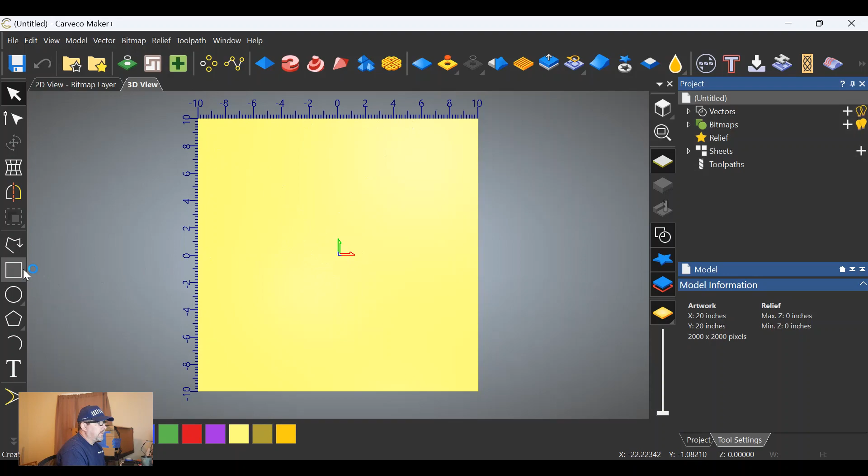At any rate, 20 by 20 work area. If you're using Carveco Maker Plus, I'm assuming you can get to this point without me showing you how. Origin is in the center, work area is 20 by 20 again. We're going to begin by grabbing the square tool, starting in the top left and dragging to the right to create a square that matches the size of our work area.

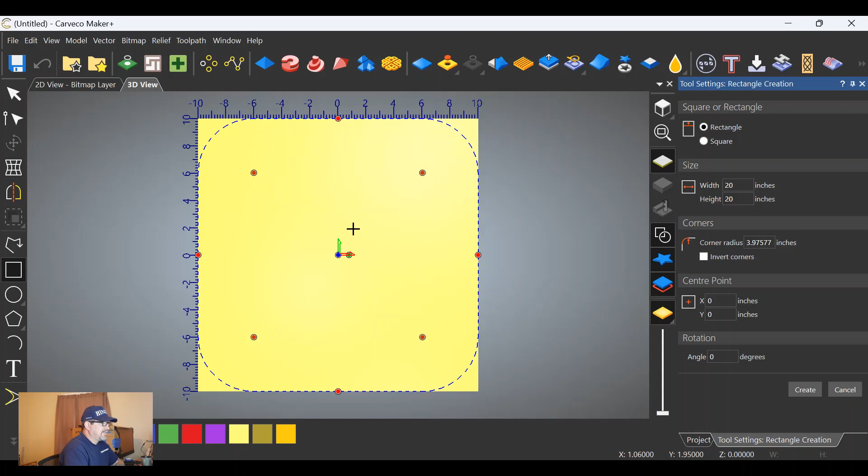We're going to grab the corner here and pull it in like this. The reason for pulling the corner is we want this round or radius on the back side, which will be the back portion of the dish in your seat. This is an artistic impression - you have to decide how much of a round you want back there. Once you've determined that's what you'd like, create the square.

We're going to go to the transform tool and make some adjustments. We don't want the dish in the seat from edge to edge, otherwise it won't look right - it needs to be a dish in the center. So go to transform, leave height alone, width we're going to change. I think I'd like a 1-inch space on each side that's not carved, so that puts us at 18 inches in width. Click apply, and make sure your aspect ratio lock is off, otherwise it'll mess up your square. Alright, we have that where we want it now.

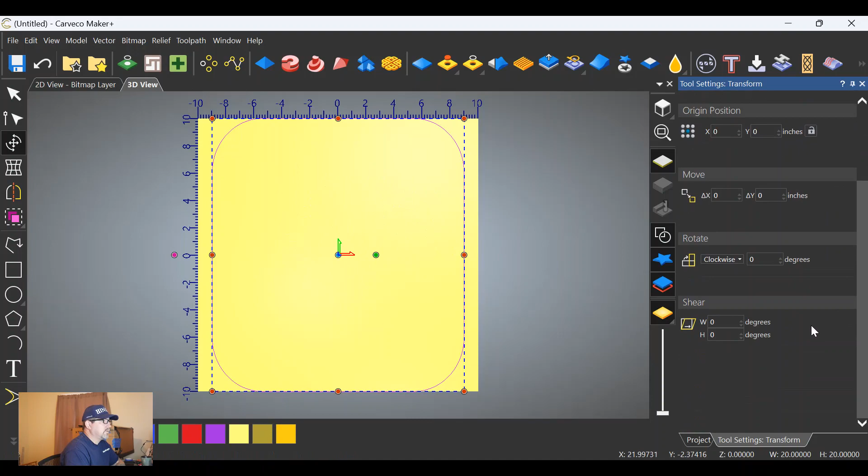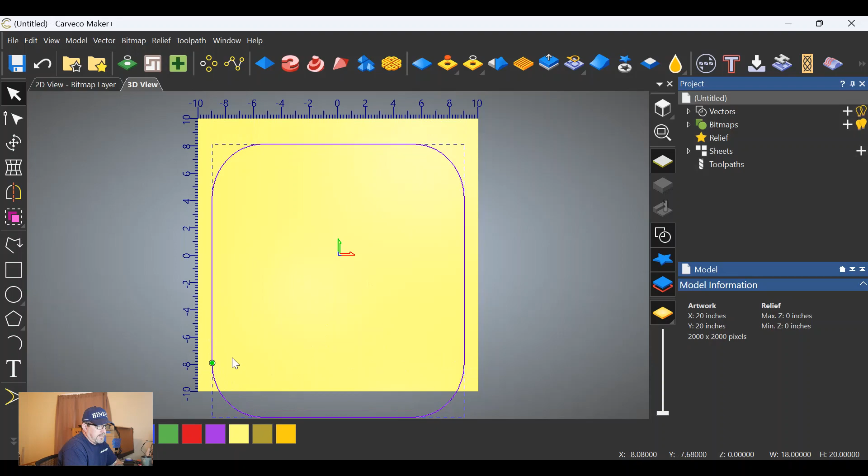We can click back on the selection tool. Here's where we begin to lie to Carveco. We're going to click off and click on again, that's just my habit. We're going to use the arrow tool to pull the rectangle down. I want to pull it down enough so that this line on each side is at the bottom of our work area. Drop it down like this, and once it's a straight line, we'll stop coming down. Now this is where we begin to lie, like I said.

This is how I do these tutorials and these carvings - there's probably 100 different ways to do them. If you find another way that's easier, go ahead and have at it, that's your way and that's great. This method works for me. Alright, we've got that square where we want it, let's click off of it and deactivate it, as they say.

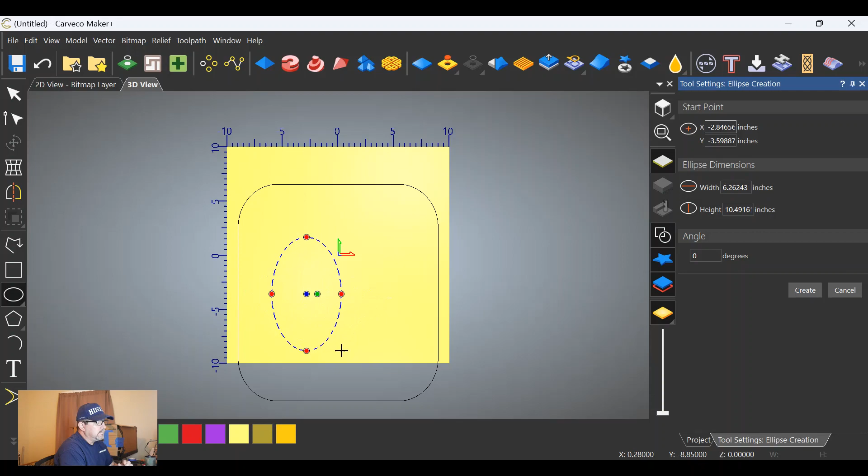Go over here to the circle tool, left click, hold down, and go to the ellipse. We're going to create an ellipse in here about anywhere, left click and drag out. As we go down, the ellipse is horizontal, and that's not what we want - we want vertical, like this. This is going to be the center portion that creates the rise between your legs in the seat. This is an artistic impression - how wide, how tall, how far back into the seat - that's all a matter of preference. Once we have it where we like it, let's create that ellipse.

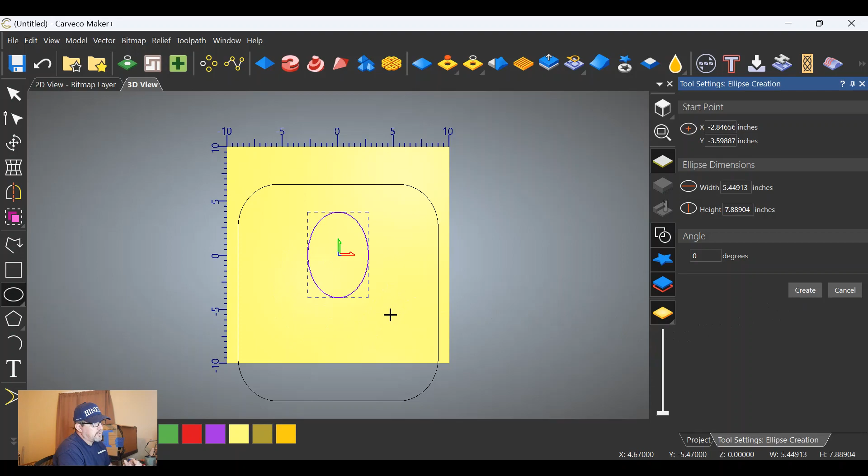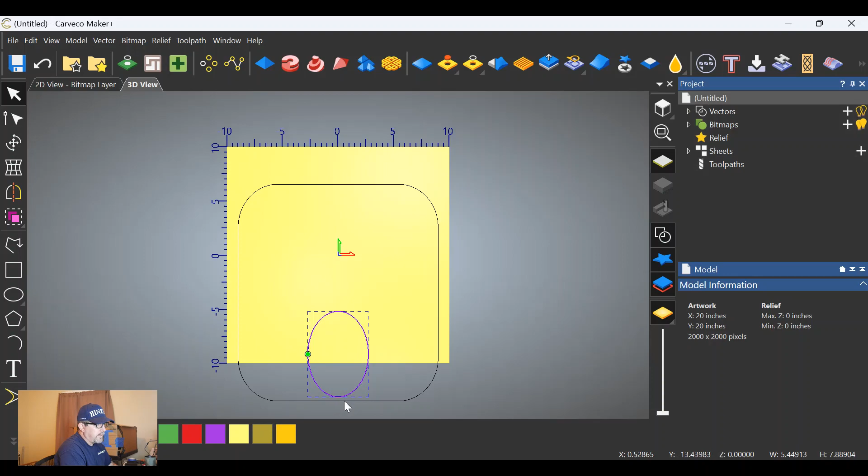I hit F9 to put it in the center of the seat, but it's not going to remain there - we're going to drop it down and continue the lie here. With the arrow tool pulling it down, let's go to the selection tool and click on it again. We're going to pull this down to the point where, if you look here, you have a round portion, and we don't want the carving tool to carve that because it'll create a point on the seat. We want this a straight wall, so continue dropping down until we get as close to a straight wall as we can without these two vectors intersecting. Let's zoom in to make sure, and click off of it to get a better idea.

That's perfect. All we need to do now is create a relief carving. I take that back, we're not to that point yet.

What we need to do now is highlight both vectors, go to the shape editor, and click round here on the top. The angle we're looking for is 10 degrees, that's what I use. Again, all of this is an artistic decision. You might want to go deeper, more shallow.

It's all up to you in your chair, and this may go trial and error. When you make your first one, you'll decide, hey, that wasn't enough, I need to go a little deeper. We're going to limit the height because I want the bottom to remain flat no matter how far down I go into the seat pan. We're going to limit the height to 5 inches.

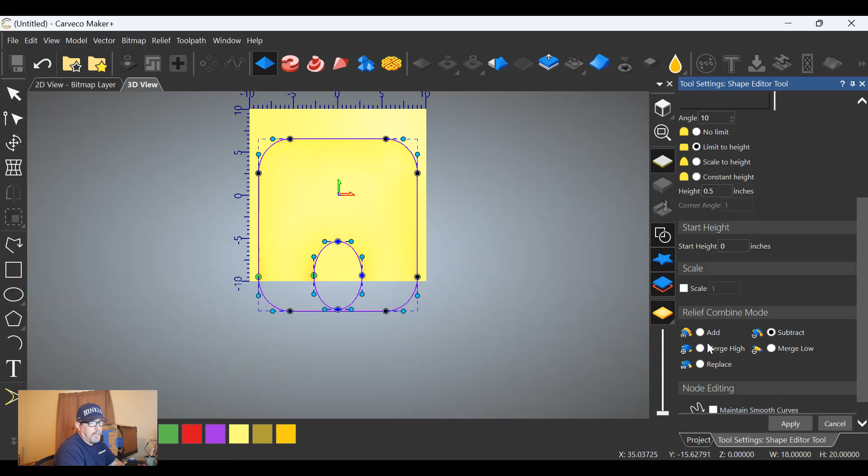And we want to remove material. We don't want to add to it. We don't want to rise in the seat pan, we want to dish. So we're going to subtract material. Click apply. If you go over here and click in this space and push down on the center wheel button on your mouse and rotate this, you can see that it's dished out.

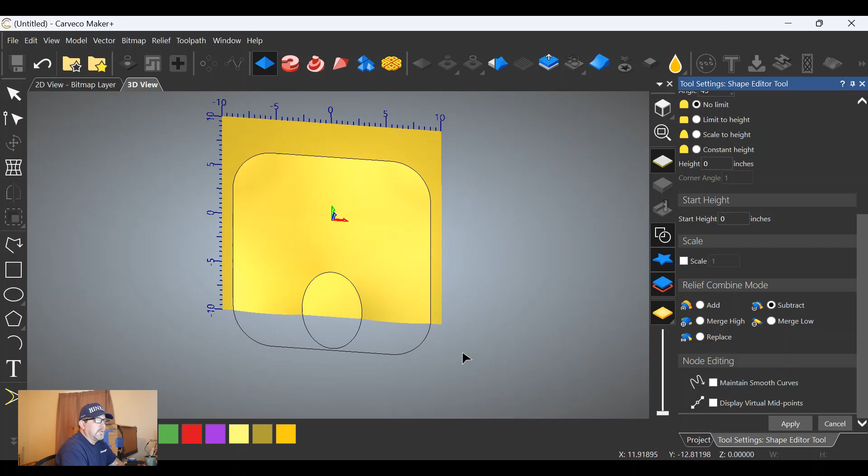It's a little difficult on the computer screen, but you can see there's a dish. So now all we need to do is create a relief carving toolpath. Click off of this drop down. Your selection tool is still lit. Highlight both vectors, go to the relief carving toolpath. We're going to do selected vectors, not a whole relief. We want inside vector. We're going to click to collect and select, that's a good one.

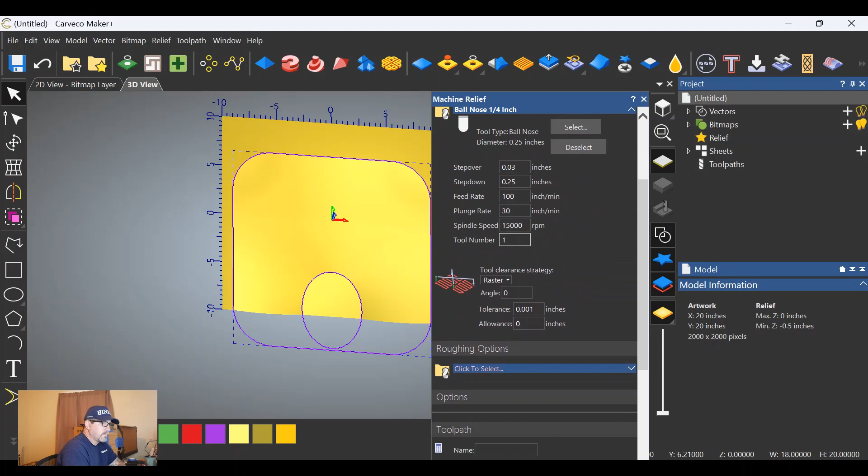We're going to select a finishing tool, 1/4 inch ball nose, that's what I used. Click on it once more and call it tool number 1. Go down and select a roughing tool. We're going to select a 1/4 inch end mill.

Again, this is all preference. You can use an 1/8 inch if you'd like, or a bigger tool if you have a bigger tool. 1/4 inch happens to be what I have, so select that. Back to the finishing tool, step over in this case.

In this case it's 0.03, and you can reduce that to minimize the amount of sanding you'll have to do, but the closer or smaller the step over, the longer this is going to take to carve out this seat pan. Now, you can certainly sand on this thing a lot faster than allowing the machine to have a ridiculously low step over, because there's not that much detail here.

You can sand this and smooth it out a lot quicker. That's my choice, again that's how I do it. We're going to save these in separate files when we save the toolpaths, by the way, that's why I'm doing tool number 1 and tool number 2. We'll go down and Safe Z is correct at 0.1.

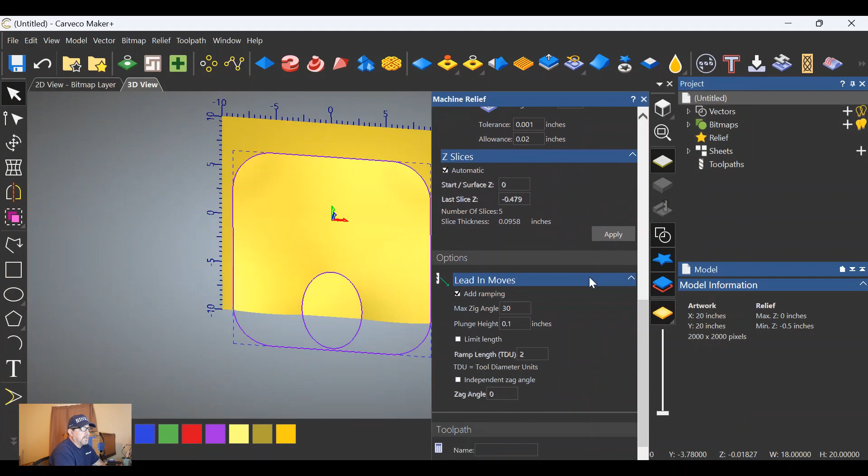Let's click to define the material. We'll make that material 1.25, that's how thick my seat pan was. And we'll give it a name, we'll call it seat pan. It's not really necessary to name your stuff, but in this case we will. And let's calculate the seat pan.

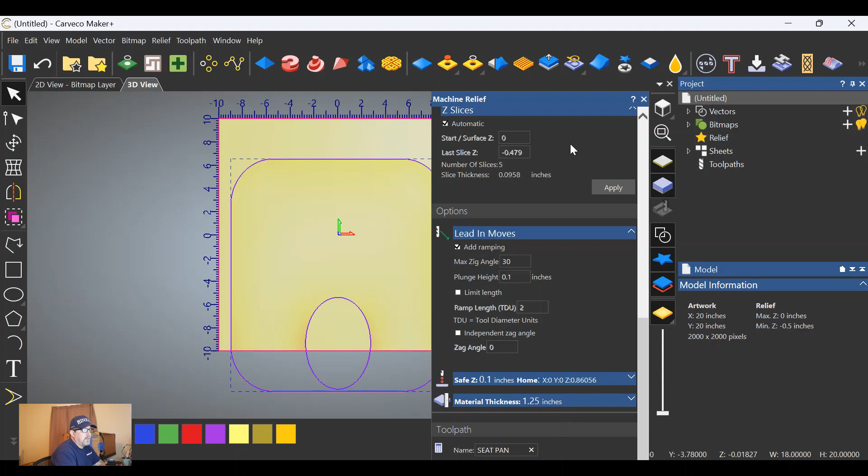Now we'll watch the green bar go across here. Bucky's Customs caught me on this one, they said, Vernon, that's not a red bar, that's a green bar. Well, I'm colorblind, red and green, so it is a green bar. I confirmed that with my secretary, wife, and boss. She said, yes, it is green, so we'll watch the green bar, but we're in good shape now.

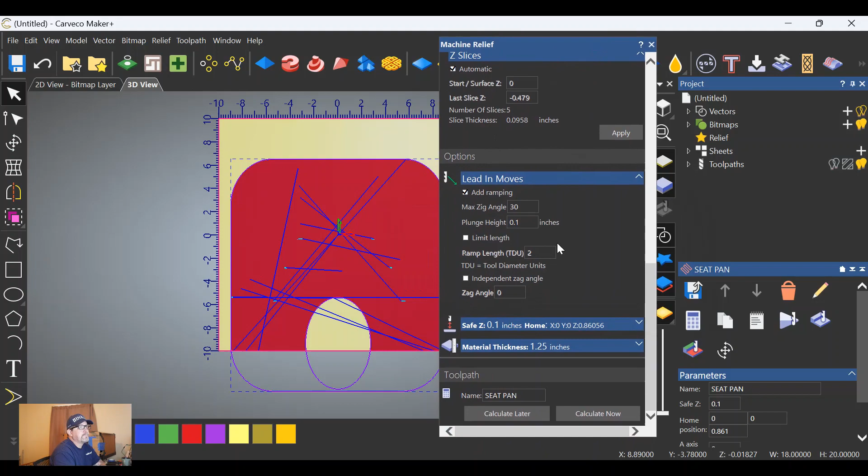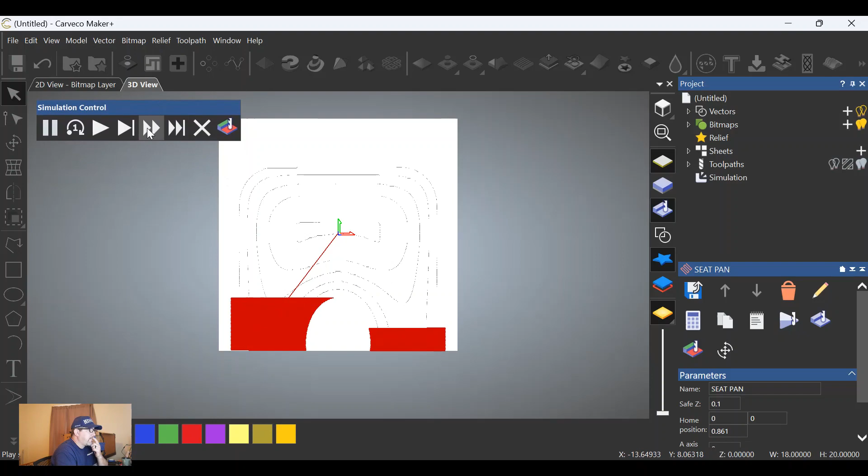Let's close this drop down out. Let's simulate the toolpath so you can see that I actually did this. We'll do a little faster than this. You can see how the tools are going to go, let's double up the speed here so it goes a little quicker. Let's go again, we get it faster here. Back and forth, and we will have a seat pan here.

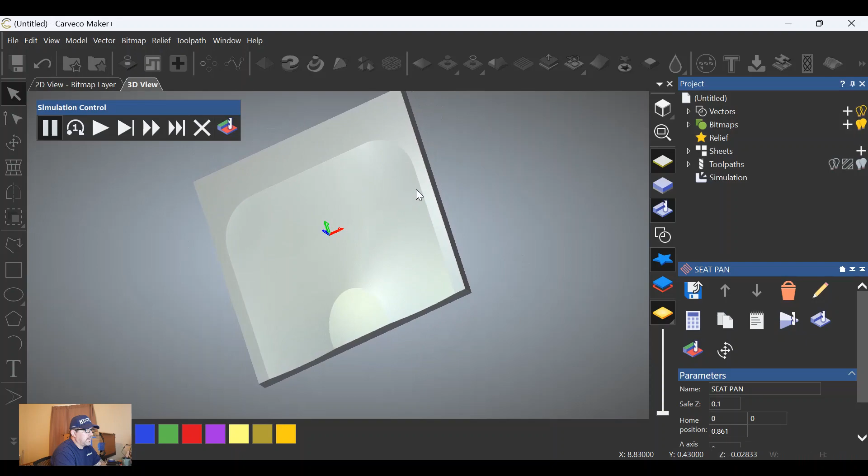Just like that. Now, it's a little difficult to see this, but I will rotate it, and hopefully we can see the seat pan there, you can see it's dished out. And as I said, the machine is not going to carve down in here. It doesn't even recognize that that is not there. It'll just start here at the bottom of the seat and create the pan.

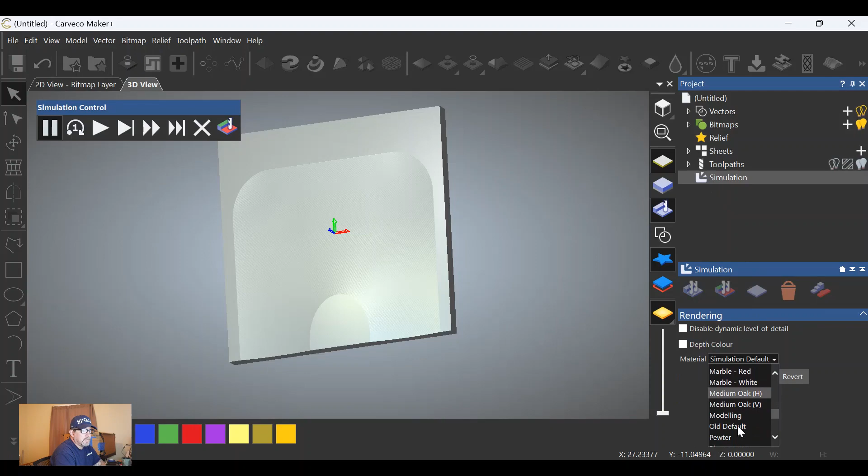Let's change the default material or simulation default to something maybe a little easier to see. Let's go to medium oak works, let's apply. And as you can see, it is definitely dished out. Let's pop this in the center and move it like this.

So there's how you make a seat pan. Now your seat pan will be shaped a little differently in the corners, you'll round the corners probably, maybe round the back. But the purpose of this video was to show you how you could create this dish effect in the bottom of the pan.